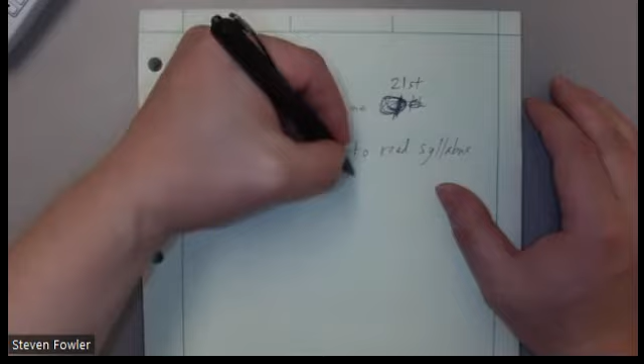All right. What's the best way to say this? Make sure to read the syllabus about missing an exam. You email me the day of the exam and say, I'm called into work, I can't come in. All right, that's option B. If you no call, no show an exam, that's a 0. Okay, so just be aware.

If you can't make the exam, let me know as soon as you know. If you can let me know 24 hours in advance, we could go with option A. I'll check my email throughout the weekend. I really need more than 24 hours to do it well. But if you give me at least 24 hours, I will work with you. I'll put you in the testing center. I'll have to write you a different version of the test than what everybody else gets, and I'll do my best to make it the same or similar difficulty. The more time I have, the easier that is to do. Inside 24 hours, I just can't do it.

I used to be a lot more lax about that. It just got overwhelming. 24 hours, that's really not enough. Okay. Any questions about that? Does that make sense? Simple thing, just be here, and neither one of us has to worry. I know things happen. If something happens and you can't be here on Tuesday the 21st at class time, let me know as much in advance as you can. Let me know one way or the other. Even if it's after the fact, you gotta let me know. If you just show up the next day, that's a 0. There's got to be a reason you didn't show up, right?

Okay. What else here? One advantage in the summer is since we've got a little more time, we don't have to start right at noon. We'll start probably around 12:05. It's not like a regular class where we've only got 75 minutes and we have to get you guys in and out so the next class can come in. We can be a little more relaxed about it. Whenever we start the exam, I'll give you 75 minutes from the time we start. So let's plan on probably starting around 12:05.

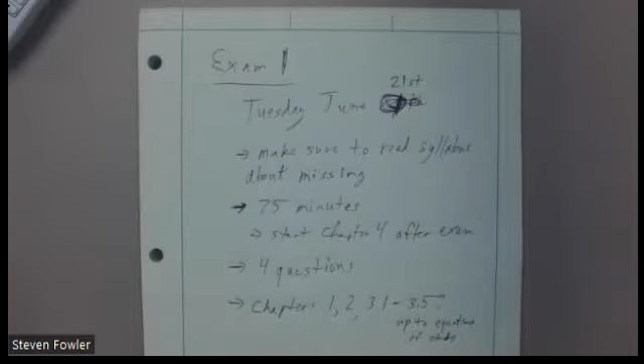So, kind of alluded to here, content is going to be chapters 1, 2, and then sections 3.1 through I think 3.5. Okay, it's going to be up to equations of state, not including equations of state. So the 3 videos I've asked you to watch, those are not on this exam, but they will be in the rest of the class. What else?

As we mentioned, the syllabus. Resources you can use. You get one sheet of notes.

Eight and a half inches by 11 inches. So specify size. You guys are engineers. Don't come in with 8.5 meters by 11 meters. That's too big, right? 8.5 inches by 11 inches.

I'm not picky what you put on. If you want to put a bunch of example problems on there, I would suggest you might rethink how you're working your homework problems, work some more, but you're welcome to, right? If that's what's going to help you, by all means, that's okay. If you just have some equations on it, that's fine.

Right? Probably won't have to put a lot of conversion factors on there if you're familiar with how the inside cover of the back of the book works. There's plenty of conversion factors there, so you should have what you need.

Are you okay if I print that off? Yes, absolutely. So here's the rule. It's an open book exam. So any material from the Çengel and Boles text, any version, I don't mind you having a printed copy. It's the same thing as somebody with a textbook.

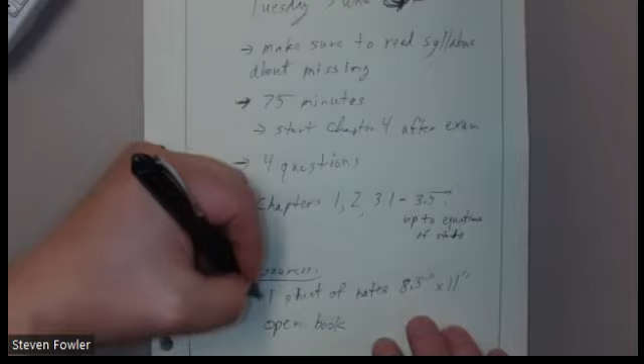And even if you have a textbook, I don't mind if you print additional copies. As long as it's from this text, this set of authors, yes, that's fine. Yeah, open book or printed material from this particular book.

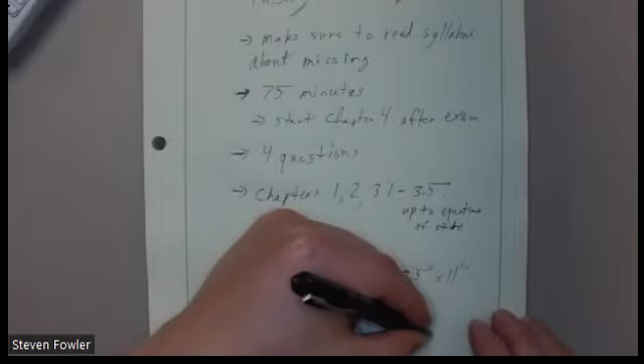We talked a little bit about calculators. Right now, I tend to be a little open with them. My general rule is without internet. So as long as it's sitting on your desk, you cannot access the internet wirelessly. Without internet or PDFs. So if I think you're looking through a solutions manual or something like that on your calculator, we're going to trade it out for one of mine.

Questions? Does that make sense? If you're just using a standard calculator, you should be just fine.

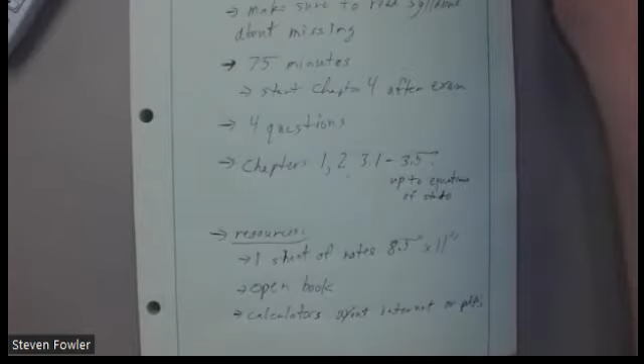I'll try to write a little bigger than that next time. Realize that's my limit now. Been a while since I've taught on a document. We'll make it work.

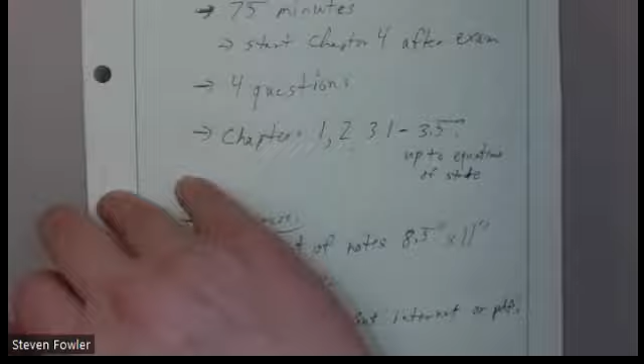Okay, so logistically, that's how the exam works. I will do everything I can to make every exam logistically work the same way. It'll just be different content and different questions.

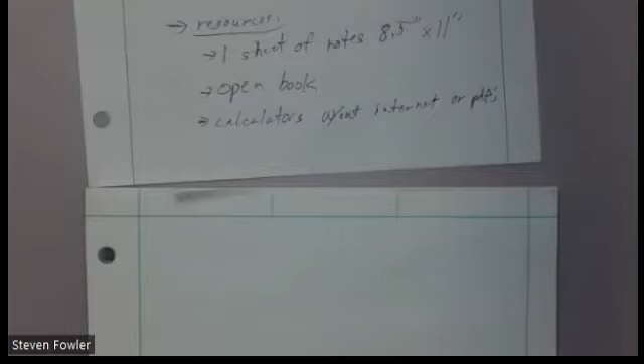All right. Then look at content. So are there particular questions you want me to look at? Maybe some examples or some homework you're struggling with? I don't mind doing that. I don't have any examples pre-worked out.

What I normally do is I go through kind of an outline of the material, give you kind of a refresh. We've seen the theory, worked some examples in class. Now you've worked some homework. And we come back and we look at the theory one more time, just kind of quickly. And that normally helps solidify things together.

But if there are particulars you want to look at, it's free form. We've got the time. I don't mind. If you think of something, let me know. Stop and say, I've got this example, or what about this topic from the homework? Give me a problem we can look at.

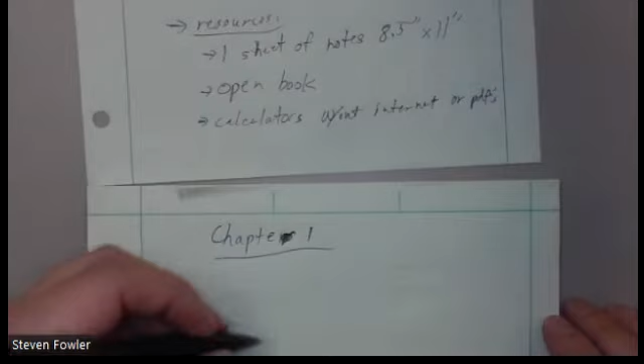Okay. So we look back at chapter 1 just real quickly here. Dimensions, units, which is going to be, as an engineer in the United States, the bane of your existence. Especially in thermal science classes. Thermodynamics is kind of the first of the thermal sciences that most people will take.

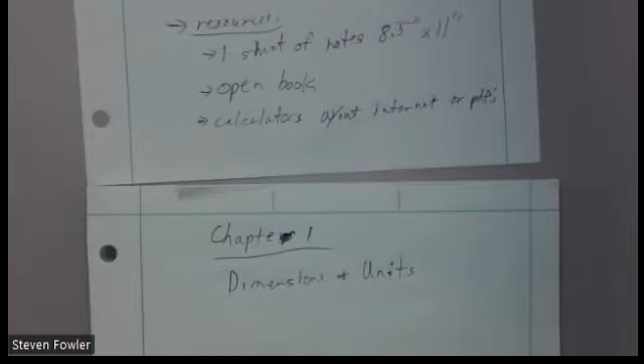Many of you will go on to take a fluid mechanics course, and after that, maybe go on to take a heat transfer, or maybe transport phenomena, which is like heat, mass and momentum transfer for chemical engineers. These are all what we consider the thermal sciences. And units are important in all of engineering, but it really makes some of the problems in thermal sciences a lot more challenging.

So when I'm adding or subtracting terms, they have to be in the same units. I can't get them to be in the same units if they're not the same dimensions. If a student asked me, okay, well, how can I convert BTUs to PSI? Can't, right? Those are different dimensions. That's energy and pressure. All the conversion factors in the world will not get you from PSI to BTUs, as pressure is not energy, and therefore we cannot convert those.

So those are different things, but units are used to measure dimensions in a standardized quantity that's easy for us to communicate.

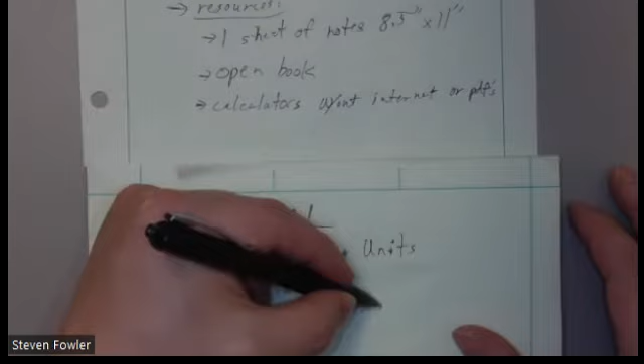We talked about systems. What are the two types of systems we talked about? Two types of systems. What are those? Closed is one. What's the other one? Right, so it is an open system, but we don't normally call it that. We call it something else.

Control volume. Control volume, absolutely. So control volume is kind of like an open system. Why? What is the difference between the two? One allows mass to go through and the other just allows energy. So for control volume, mass can cross the boundary. Closed systems, no mass crosses.

It's just a certain amount of mass contained in some kind of container. For us, it's going to be contained in some kind of container or tank. In your later classes, sometimes they will go on to more general definitions than just that. For our purposes, it's going to be like a tank. The closest is going to be like a tank or a piston, something where the mass is not crossing the

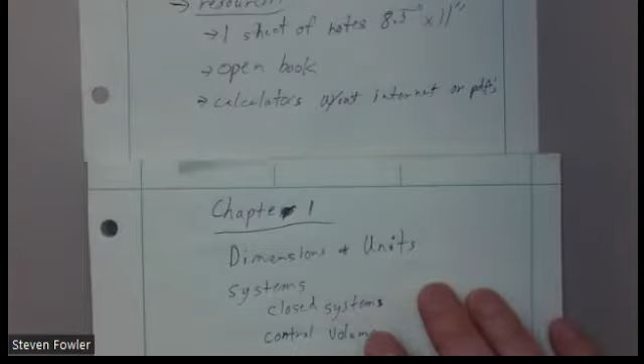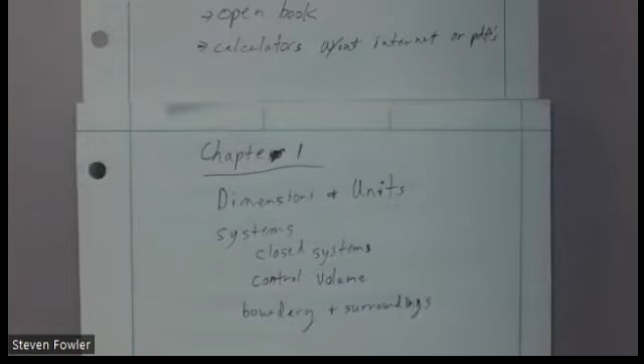boundary. Control volume is just we've established a boundary around some sort of device where mass is going to flow into or out. All right, very good. And of course, the boundary is what's going to separate our system from its surroundings. Chapter 4, we'll talk a lot more about what happens when that boundary moves, the volume of our system changes. There's an energy associated with that we've got to keep track of.

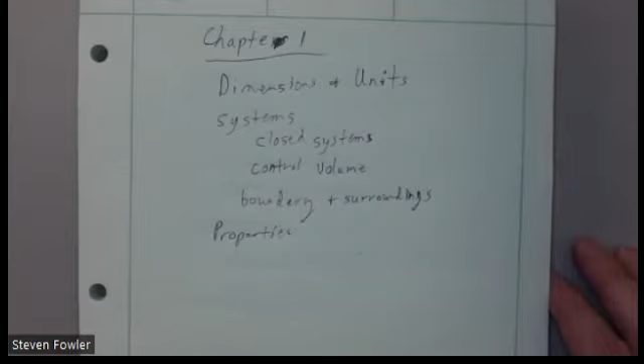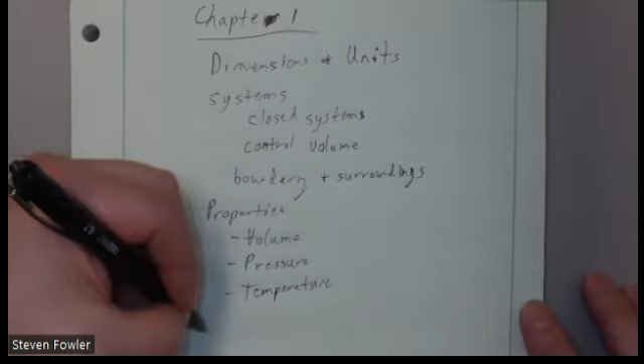And then we talked about properties. Properties are basically dimensions for our system, things we want to measure for our system. So there are three properties that are easy to measure: volume, pressure, and temperature. Within volume, of course, we talked about the idea of density, which is mass per unit volume, which is the reciprocal of specific volume, because specific volume is total volume per unit mass, the reciprocal of density.

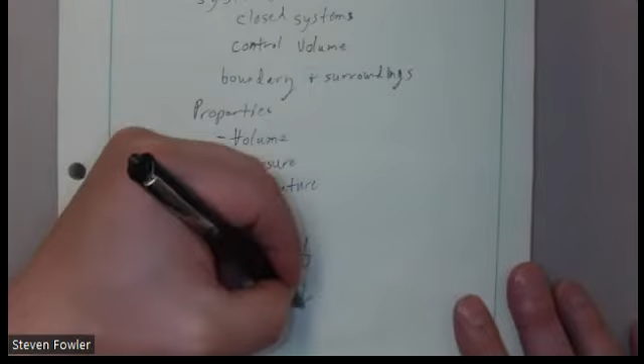So we'll use specific volume in this class more than we will density. We'll use density some, but we'll really focus on specific volume, and you see that in the property tables in chapter 3. A lot of times we're working with things that can be in the vapor state. It's easier to work with the specific volume of vapor than its density, because the density is really low. Working with liquid, I probably want to work with the density because the density is high and the specific volumes can be very low, because they're reciprocals of each other.

We talked about the different temperature scales. The change in temperature is going to be the same. A change in Rankine is the same as a change in Fahrenheit. A change in Kelvin is the same as a change in Celsius. But Rankine and Kelvin are the absolute scales. And we talked about pressure.

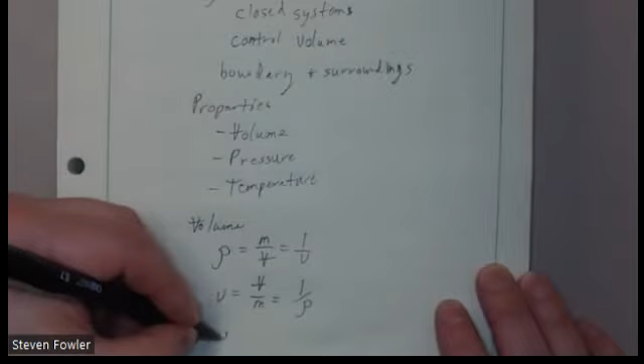And we said in a column of fluid, the pressure will change. The change in pressure between two locations, 1 and 2, is going to be the density of the fluid between those two locations, times the local gravitational acceleration, times the change in elevation. In this case, if I've got P2 minus P1 on the left side, here I'm going to say Z1 minus Z2, because I'm referring to Z as elevation. Z is increasing as we go up.

You can write delta P as rho g delta Z if you're referring to Z as depth. So as I increase depth, I will increase pressure. This text prefers to use Z to refer to elevation. It took me a few years teaching it to get used to it, because I actually learned Z as depth in this equation. Once I realized this, it makes sense what this text is doing. They're using Z as elevation in multiple places. It's dependent on the weight of the fluid above the location, which is going to cause an increase in pressure.

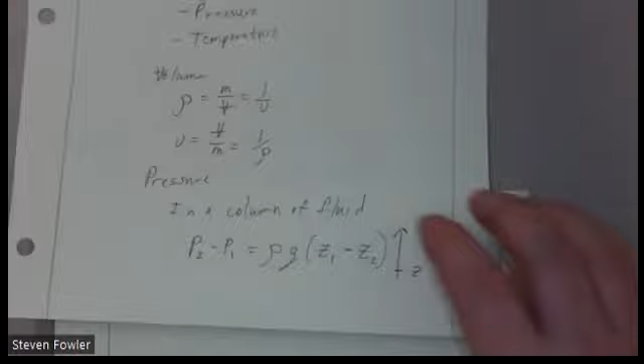If you have multiple fluids, there's a variety of ways we can splice this equation onto others. You can just set up 2 or 3 equations, one for each fluid, and splice them together algebraically. Or there are some methods you can learn on the internet or in other texts about writing a single equation, add this term, subtract this term. If you're okay learning and memorizing those rules, that's perfectly fine. If you want to stop by, I can point you in the right direction. I just don't like doing that in class because there are a lot of details that get mixed up.

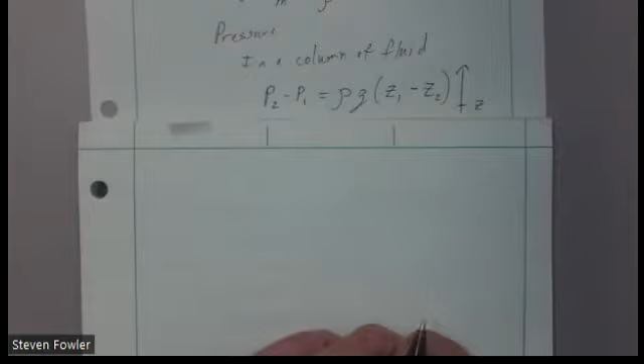Okay, that wraps up chapter 1. Again, chapter 1 is focusing on systems and properties. We have to understand dimensions and units to understand properties, because properties are dimensions. We talk about the different properties of a system that we can measure. Then from there we get into chapter 2.

Chapter 2, our focus is on another dimension, another quantity we call energy. So in a physics class, they would have introduced you to forms of mechanical energy: work, kinetic energy, potential energy. These are mechanical types of energy. It's very easy to convert mechanical types of energy to one another. Here, we're going to also introduce a couple of other types of energy that maybe you didn't see in a physics class. We're going to talk about what we consider more of the thermal types of energies.

The first law is just simply conservation of energy. The second law is going to be more focused on which type of energy we're dealing with and how they can be impacted. But we'll get to that in chapter 7. Right? We said a general energy, E, would be the sum of different types of energy. And so if I've added different types of energy, maybe I'm adding heat and work together. Those are different kinds of energy. So I would just represent it with a general term.

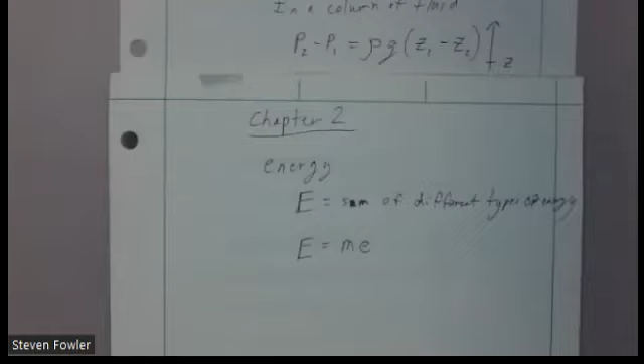And big E, we can find if I know the mass of my system and I know the specific energy, the energy per unit mass within the system. So we do this a lot. We'll use a lowercase variable for something that's what we call intensive. It doesn't matter how big or small the system is, it's easy to scale up. And if I know how big or small the system is, I can multiply by mass, and that gives me the total energy. We see the same thing back over here with volume. We'll see this with a variety of variables throughout the semester. This is common in the thermal sciences.

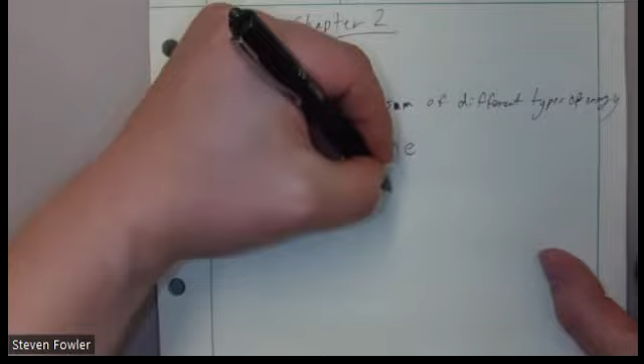If something is per unit mass, we'll use the lowercase variable. We're doing the same thing here. Lowercase e is per unit mass, so we use the lowercase variable for the intensive property. Okay. Energy rates. We said if I put a dot above a variable, that means it's a rate. It's being measured per unit time. Something else that's common in the thermal sciences. This is E dot. E dot would be the product of m dot and lowercase e. Lowercase e is energy per unit mass. M dot is mass per unit time. Energy per mass times mass per time gives me energy per time.

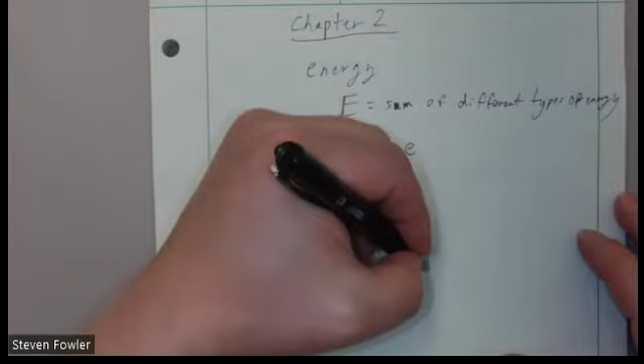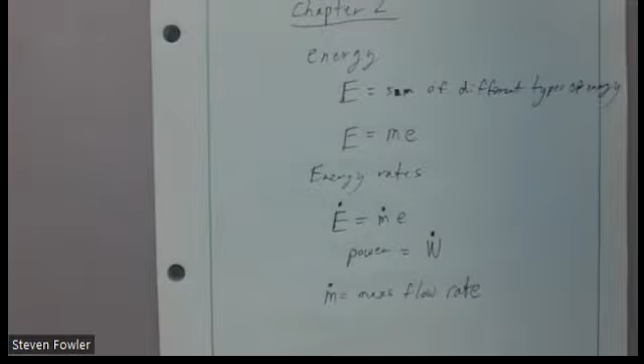And again, the term power is specifically work rate. I wouldn't count you wrong if you said the rate of heat is power, or any general energy rate is power, but we normally reserve power specifically for a work rate. What else then? I've mentioned here the m dot, which is the mass flow rate. Not the E's. Anybody remember how we find mass flow rate? There's a variety of ways. Yes. Density times volume flow rate.

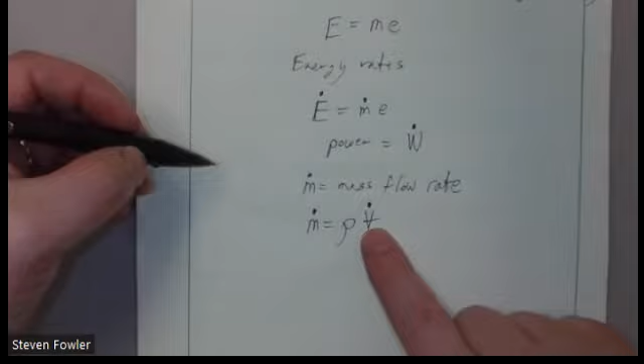If we look at the dimensions on this, this is mass per unit volume. And the volumetric flow rate, the V dot, again, you put a dot above a variable, that's per unit time. So it's volume per time. So mass per volume times volume per time leaves me with mass per unit time. How can I find V dot? We can go out with a measuring cup and a stopwatch. That works if it's water. Not so good if it's ammonia. That kills us, right? So this is something I can't go out and physically measure.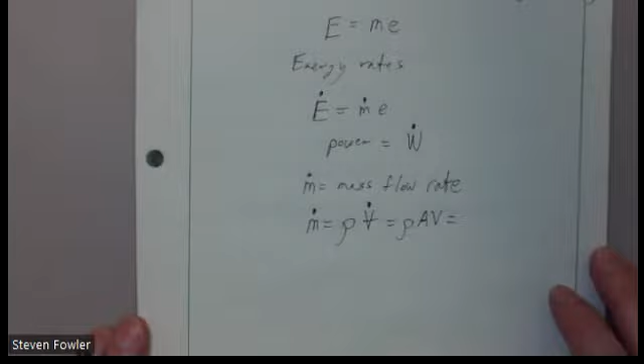What we can do is, if I know the cross-sectional area of the conduit and the average speed at which the fluid flows through that conduit, the product of area times speed gives two lengths and a third length per unit time. That's 3 lengths per time, volume per time. So the average speed of the fluid times the cross-sectional area gives me the volumetric flow rate; multiply by the density, that gives me mass flow rate. And have some way of knowing which V you're talking about, because all three of them show up right here, because the reciprocal of density is the specific volume and vice versa.

So I can also find this if I know the specific volume, by dividing by specific volume instead of multiplying by density. So know which V you're talking about. Let the units be your guide. If it's length per time, that's a speed. Volume per time, that's a V dot. If it's volume per mass, that's a lowercase v. All right.

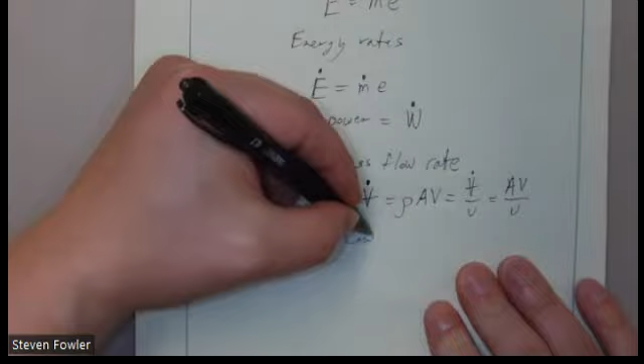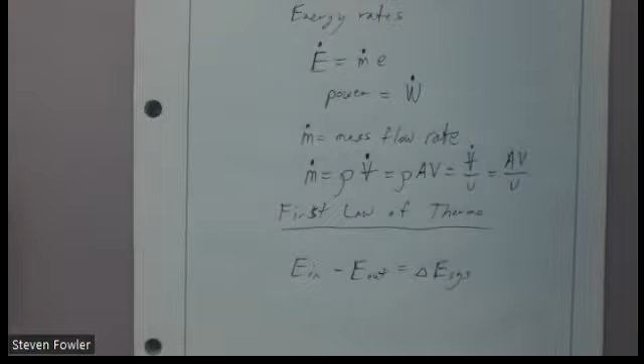So again, what we're doing in chapter 2 is introducing the first law of thermodynamics. The first law of thermo simply says that if I take the total energy coming into my system minus the total energy out of my system, that equals the change in the energy of my system. In minus out.

Now, you can write the big long equation if you like. That's okay. That's what we're going to do next. If we think about our system, what types of energy can come into the system? Well, that can come in 3 forms. There's 3 types of energy that can cross the boundary. That's heat, that's Q. There's work, that's W. And if I've got any mass flowing, that's also going to have its own energy.

So these are all the types of energy that can come in. So I'm going to add all those. I'm going to subtract all the types of energy that can go out. And that's the same ones. Q out minus work out minus energy of mass going out.

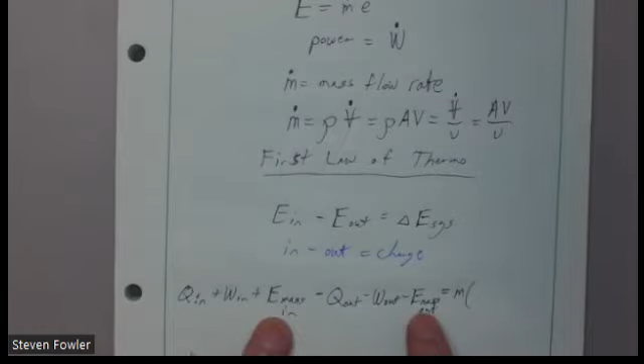Now, if I say this is equal to the change, if my mass is constant, I can factor that out. Now, it's possible I have as much mass coming in as I have mass going out. I just have to account for the energy. If the mass happens to be constant, then I just have m times all the specific energy changes.

Well, what types of energy can the system have? The system can have internal energy, so that could change. It can have kinetic energy, that's v squared. It's v2 squared minus v1 squared, both over 2. And it can have potential energy.

Just about ran out of room. Probably should have moved to the next line. Normally, I don't like writing in the margins of engineering paper, but I'm just trying to squeeze one line.

Add the ins, subtract the outs, that equals the change. I would suggest having that on your equation sheet, obviously. But what I'm trying to preach to you here is don't think about this as just one equation with lots of terms. Think about this as a concept. Think about this as, again, you're conserving energy. That means the in minus the out has to equal the change.

And then you can kind of break it up into pieces. You don't have to remember each term arbitrarily. You can remember, all right, what are the types of energy that can go in or out? Heat, work, mass. So I add those terms in, subtract those terms away. And that equals the types of energy that can change. There's 3 types of energy that can change. It's internal, kinetic, potential.

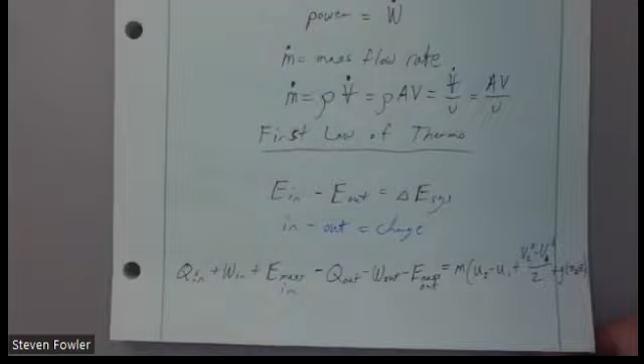So it's a process. We're kind of building as we go, right? And we're getting up to now where we're going to really start working on some pretty interesting problems, but let's make sure we've got a good handle on chapter 2. So there's another concept that shows up in chapter 2. We don't see it too much after chapter 2 for a while. There's this idea of

efficiency. We use the symbol eta to refer to efficiency. That's common in most engineering. Okay. Conceptually, they like us to think about this as output over input, they being the authors of this particular text. I'm not the biggest fan of this idea. It works most of the time, so I can understand why they like preaching it's always output over input. I don't think that's fair or a good idea to say it's always output over input.

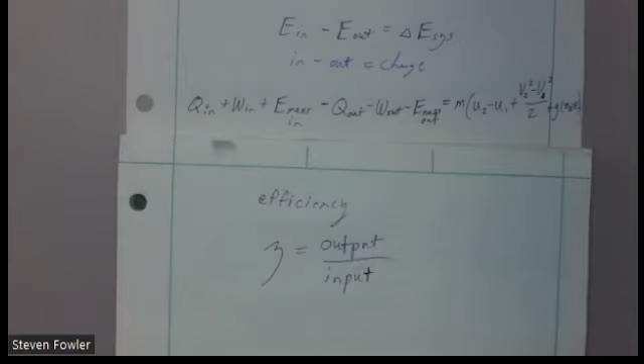Most devices we work with, we're trying to produce some sort of desired output, and that's going to be less than the required input. So it's a pretty good model that works most of the time. Conceptually, you want to think about it as what do you want or what do you desire divided by what do you have to do to get it. It should also always be the expected smaller value divided by the expected larger value. Why is that?

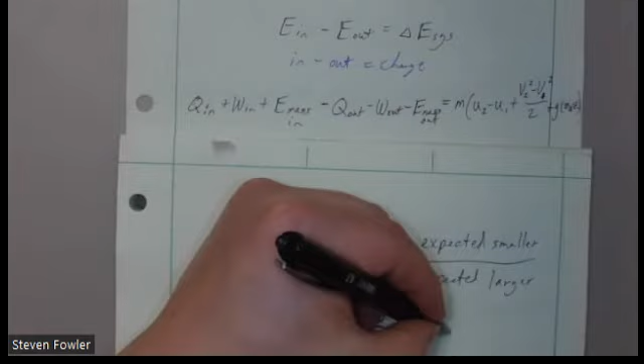Well, as a rule, efficiency is a number between 0 and 100%. It's going to be unitless. It's a ratio, so that means it needs to have the same units in the numerator and the denominator. So BTUs over BTUs, watts over watts, horsepower over horsepower. Just depends on what you're measuring. Are you measuring power over heat input? Are you measuring energy over some other energy? Are you measuring distance over distance?

Efficiency can be used for any type of thing. It doesn't have to just be limited to thermodynamics. You can take a variety of things. But a true efficiency, an actual efficiency, is going to have the same quantity or same dimensions on top and bottom. We get them in the same units. And then when we take the ratio, we get this unitless quantity between 0 and 100%. That's a true efficiency. There are other ways we can measure performance in a similar fashion. We'll see some of that in chapter 6. They aren't actually what we would call efficiencies, but they work with the same concept.

Two piles of paper here. I'm trying to keep them straight. All right. Page 4. Okay. What else have we got here? Questions so far?

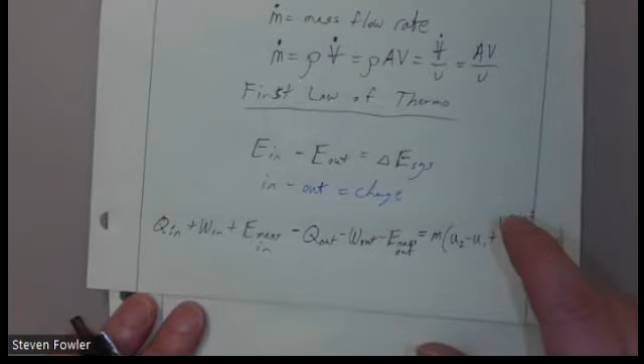That's property tables. Chapter 5, we're going to need H values. We'll talk about why when we get there. Chapter 7, we're going to need U values and then S values, the entropy values, and we find those the exact same way. So, like I say, practice that. That's the reason I set the chapter 3 quiz up for you guys. Give you some additional practice. Hopefully it helps. I was not intending to be extra burdensome, just give you an additional tool.

All right, what else then? So that brings us then to chapter 3. Chapter 2, we look at the next one on the energy rate. So that equals the mass flow rate times. Yes. Yeah, so the E dot just specifies that it's energy per unit time. So the common way we'll get there is if I know some energy per unit mass multiplied by the rate at which mass is flowing. That'll give me the rate at which energy is flowing by mass. That's the most common way we'll see that.

So in a control volume, I'll have material flowing through it constantly, and I may not know the exact amount of time over which that occurs. So all I can do is just look at the rate at which it's occurring. Thermo's kind of the first place where we really start seeing where you can work the problem a variety of ways. You can work it per unit mass, work it per unit time, depending on what's given to you. Sometimes we have to work it one way, sometimes another way. I know that's new for us, but we kind of introduced that concept. What else?

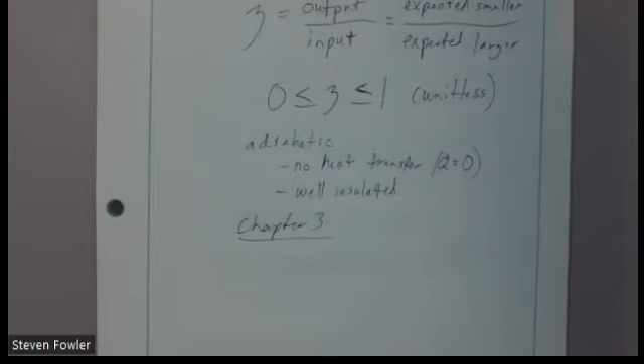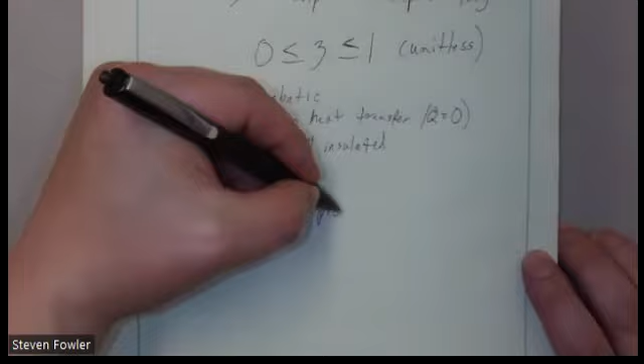Cool. Let's continue on. We'll talk about chapter 3 now. Let's refresh that a little bit. That should be somewhat fresh, but especially because it is so fresh, hitting it again does not hurt. So let's just start here. We'll just say using property tables. I might not get this exactly the way I drew it on the board the other day, or exactly how it was in the videos. There might be a difference, but the general process is about the same.

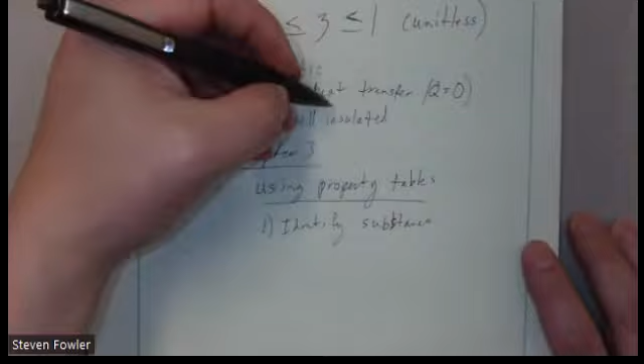Number one, identify your substance. Anytime you're looking for property tables, or determine properties, anytime I hit a point in the problem where I need to know a property for my system, whether it's a U value, an S value, or a T value, the first question becomes, what's my substance? What is my system made of? And then what tools do I have to try to quantify those properties for that substance?

For us, it's going to be water and R134 right now. Chapter 4 and beyond, it might be some ideal gas as well. It's water, R134, and typically air is going to be our ideal gas of choice for the most part. But it could be nitrogen or oxygen, carbon dioxide, something like that. We'll touch just a little bit on solids and liquids. Those are pretty simple tools. But number one, what substance am I working with? That's going to determine what path I'm going forward with.

Step 2 then is identify known properties. Now, for water and R134 tables, I say R134, it's R134a. There's technically an A at the end of it. I try to write it, but I rarely say it. For water and R134, I need at least two properties. In a rare circumstance, I might need three. We can talk about that. I'm not going to intentionally give that to you.

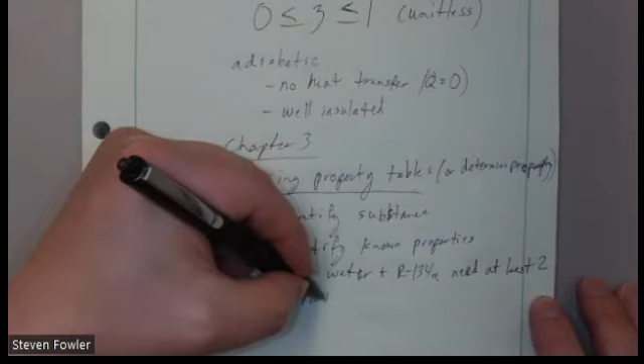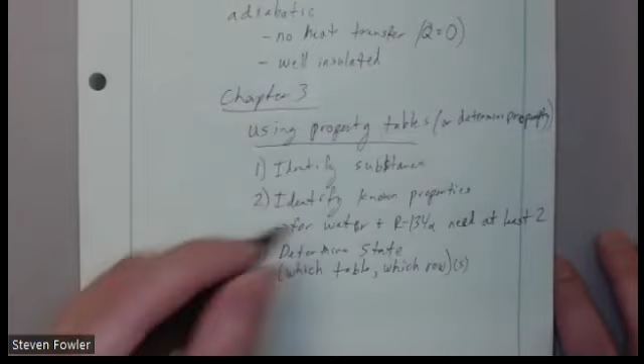Step 3 would be to determine state. Where do you live on the three-dimensional PVT surface? We're not going to plot it on the surface, but what it does mean is we need to know which table and which row. That's really what we're saying here. So if I'm using property tables, which table am I using and which row within that table are my values going to come from? Or, as we'll see, it could be rows, and then we interpolate between.

Right? So some things to mention here: you have to watch your units. And it's going to require you to determine what we call the phase. Solid, liquid, gas, vapor, where am I on the spectrum? Because the tables are broken up depending on the phase.

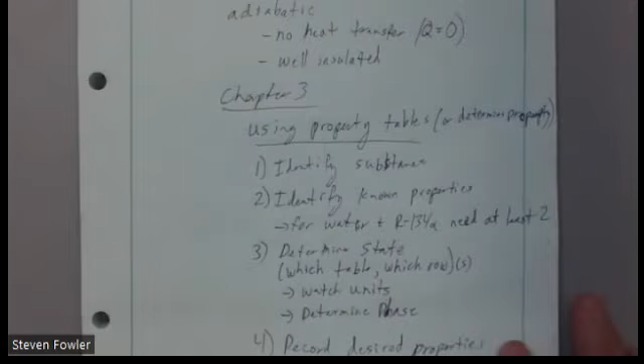Step 4 is record desired properties. You can go through and willy-nilly record all the properties. I'm not going to. I'm going to go back to my problem. So here in chapter 3, the goal is just to learn to use the property tables. We're going to go back to chapter 4, and we're going to have this problem.

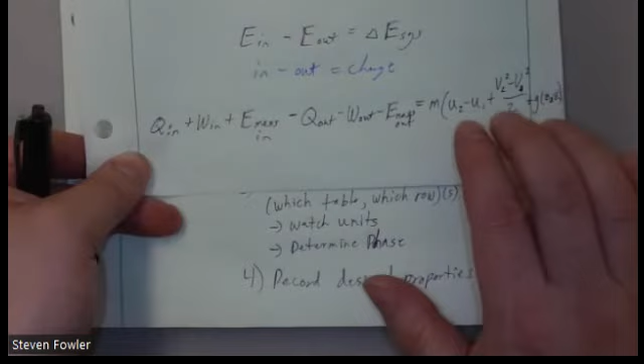We're going to take this first law equation and simplify it. We're going to have one, maybe two of these energies on the left-hand side. Probably not going to have kinetic or potential energy. So probably heat minus work is going to equal m delta U for a chapter 4 problem. So I'm going to use the properties given about my system to determine the U values from the tables and use those to find either the heat or the work, whichever one's not known. That's how this is going to look moving forward.

So which properties do you record? Well, you need to look at the rest of your problem and see which ones you need. Do you need the volume? Do you need the internal energy? Later on, do you need the entropy?

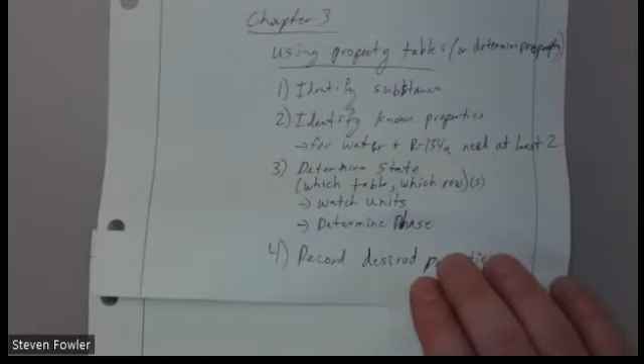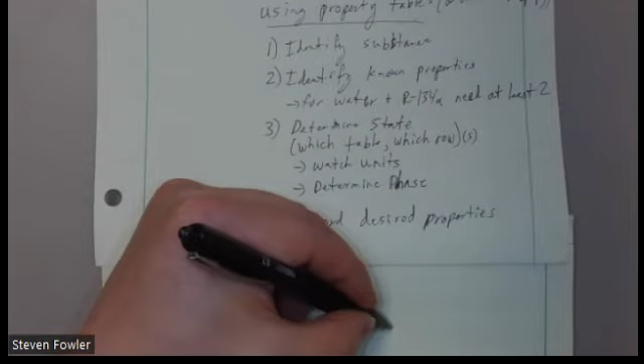Now, as we've seen, determine the phase is just a nice, simple little sub point there. But it's where most of your effort's going to be. Determining the phase is one that's going to take you some of the most practice. So we break that out into its own section: determine the phase. It's not as simple as just go do it. I mean, it is once you get used to it. There are two main scenarios.

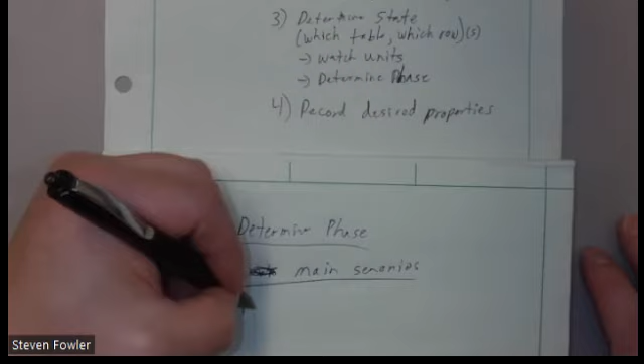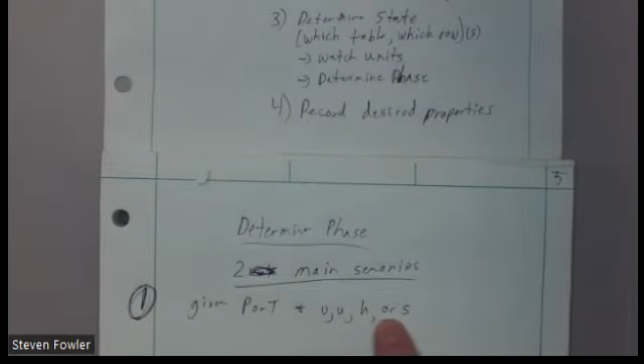So as we said earlier, you need at least two properties. That's going to come in one of two flavors, so to speak. Given P or T and V, U, H, or S. This is the first scenario: given P or T, one of these two, and then one of these four. These are your two properties. It doesn't matter which combination. There's 8 different possible combinations there, and it looks roughly the same way.

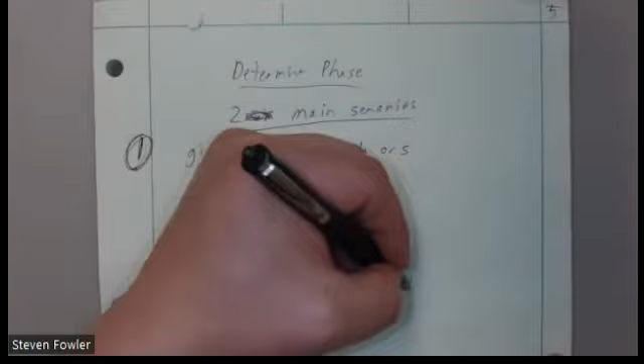You can put P or T, whichever one you're given, on the y-axis, and V, U, H, or S on the x-axis, and just arbitrarily draw this diagram. Given your P or T value, you look up the values for saturated liquid and saturated vapor. That tells you where the edge of the saturation dome is at that pressure or temperature. Then given your other value, V, U, H, or S, look up the liquid and vapor values for that property and compare yours to these two. If it puts you in between, you're in a saturated mix. If it puts you out here, you're in a superheated vapor. To the other side, you're in a compressed liquid.

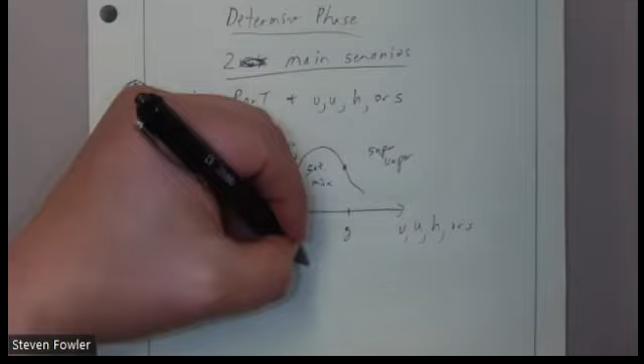Now, my preference is to draw it out. We can write this in words easy enough. It comes in the form of like 5 if-then statements. At given P or T, I'm just going to say V, and that could be V, U, H, or S. The rules are the same. If at the given P, your V is less than V sub F, you have what we call a compressed liquid.

So then, and again, what I'm writing down here is just this in words. So if the words help you, fine. If not, I'm going to write them one time and I'm not going to write them again. Well, it's worthwhile to write them one time. It's worthwhile to process information multiple ways. So it's okay to write them out. We talk about it, right? But this is probably the only time I'm going to write them out.

So if at the given pressure or temperature, your V value is equal to V sub F, that tells us we have saturated liquid. That liquid is right at the point of boiling. It's literally boiling liquid. If I add any more energy to it, some of it's going to vaporize.

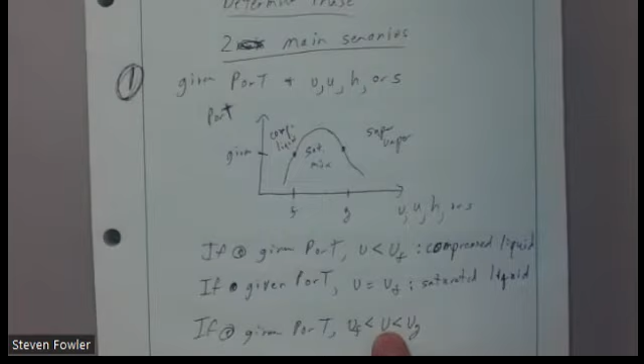Okay. Well, if at the given pressure or temperature, your V value then is between these two, so V sub F is less than V is less than V sub G. Your V value is between these two limits. That puts you in the dome range. If this is your scenario, you have a saturated mix. A saturated mix.

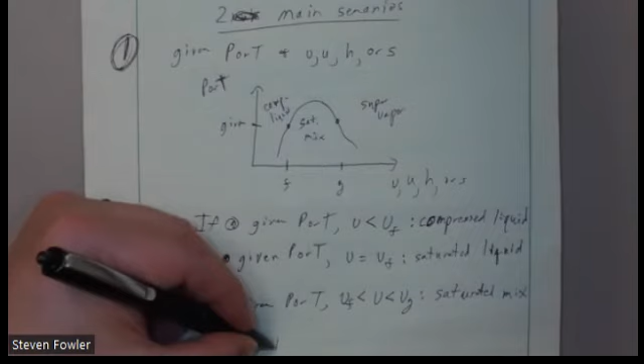So how do we do that? Well, we need to find the quality. The X value is the quality. This is the portion in the vapor phase. How much of it? It's somewhere between a vapor and a liquid. How much is vapor? How much is liquid? We're gonna have to figure that out. Well, given the V value you have, subtract from it the V value for saturated liquid, and then divide that by the V value for saturated vapor minus the value for saturated liquid. So it's V minus V sub F over V sub G minus V sub F.

And I can do the same thing for all 4 properties. This is also equal to U minus U sub F divided by UFG. That UFG value is the difference between UG and UF, so you can manually take UG minus UF. The saturated vapor value is always larger than the saturated liquid, no matter which of the properties it is. So there's always this difference on the bottom, right? And again, this UFG is just UG minus UF already done for you if you want to use it.

Same thing for H, the enthalpy. Same thing for the entropy, S minus S sub F over SFG. So once I find the quality with one of those four properties, I can use that quality, that X value, then to find the other properties. Again, remember, quality is between 0 and 1.

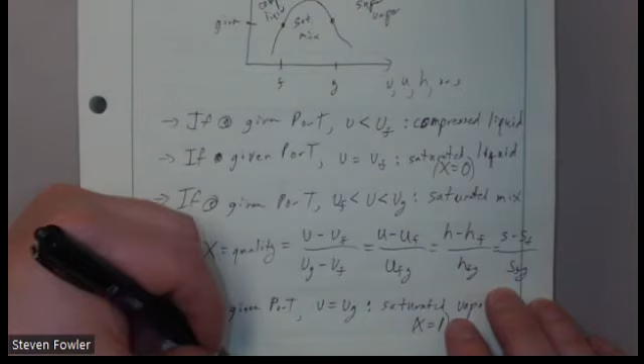So as I said, there's about 5 if-then statements. There's 4, here's the 5th one. If at the given pressure or temperature, you have a V value that is greater than V sub G, this puts you in the superheated vapor region. And then we just go to the superheated tables.

They are rather extensive. You might fall between rows; just interpolate between rows. You might fall between pressure blocks; you can interpolate between pressure blocks, between 2 different columns. If you need help with that, stop by. It's interpolation. The math is pretty simple, but conceptually I understand it's a bit of a challenge. After we do it a little bit, it starts getting easier. Questions so far?

This is one scenario. Again, my preference is the diagram because while this is thorough and very good, I don't think it's efficient myself. I'm a picture person, right? If I see it, it makes more sense to me. There's nothing wrong with this. This is perfectly good, and there's detail here I don't have here, right? I haven't talked about the quality. It's important.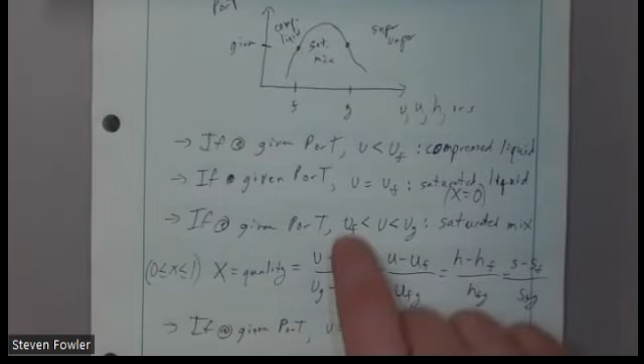This is what it looks like in words. Okay. So what am I doing here? Well, I'm saying, all right, given my pressure or temperature, go find these values and compare mine to these values. And that tells me where I am on the diagram. And that's what I'm saying here. It's given pressure, temperature, find your value. How does it compare to the other limits? And that's how we determine the phase. That's one scenario. That covers all 8 of these combinations.

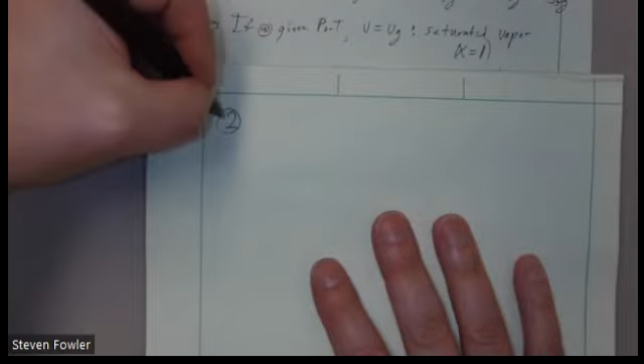The other scenario is a little simpler. Only one possible combination of that. Okay. Determining the phase, part 2. That is the scenario where I'm given pressure and temperature. Again, I think the diagram is a nice, simple place to start. We can write it out in words. I'm happy to do that. I like to draw a table when I do that. But let's talk about this second.

Put P on the y-axis, T on the x-axis. Just draw a curve arbitrarily out there. Concave up curve, half U basically. What I like to do is take the given pressure and go look up the saturated temperature. That's the boiling temperature. And if your temperature that you have is greater than the saturated temperature, that puts you over here in the superheated vapor region. If my temperature is less than the saturated temperature, that puts me on this side of the curve, which is the compressed liquid region.

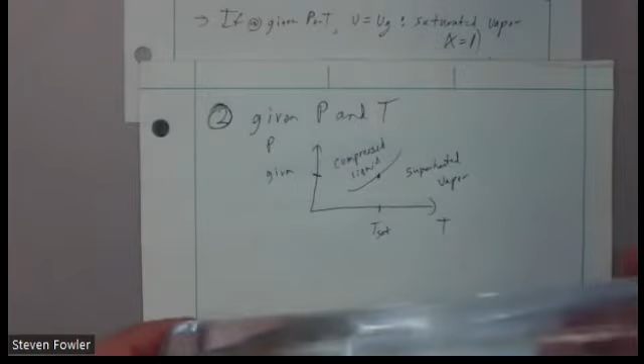An easy one to think about is I've got water here, right? So as long as this water is at 1 atmosphere, 101 kilopascals, my saturated temperature for that water is going to be about 100 degrees Celsius. So if I have water at 1 atmosphere and it's above 100 degrees Celsius, that puts me over here on this side of that curve. That's the superheated vapor region. If my water is at a temperature less than 100 degrees Celsius, this is probably 40, 50 degrees Fahrenheit. So probably in the teens in Celsius. That's going to put me over here because 100 is here and I'm back here. So it puts me in the liquid region.

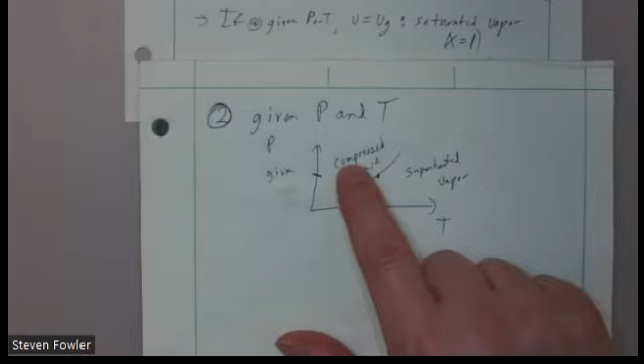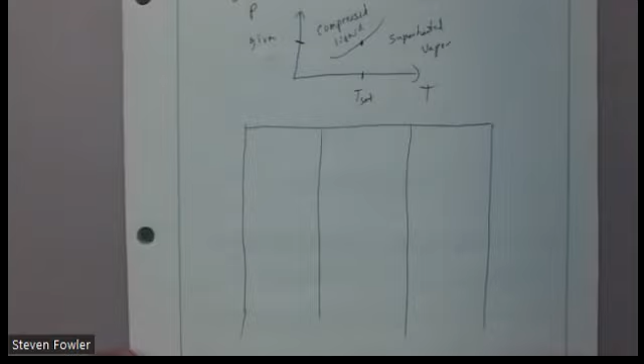Now, if we put this out in words, which is not a bad idea, again, a nice way to process information multiple ways. What I like to do with this is build a table. I'm going to build basically a 3x3 table, 3 rows, 3 columns. We'll draw 3 columns across, and we'll close the bottom off when we get it filled in. So what's this look like in words? Well, if I've got compressed liquid, what that looks like is at the given pressure, your temperature is less than the saturated temperature. And the saturated temperature is the boiling temperature. So at the given pressure, your temperature is less than the saturated temperature. That's a compressed liquid.

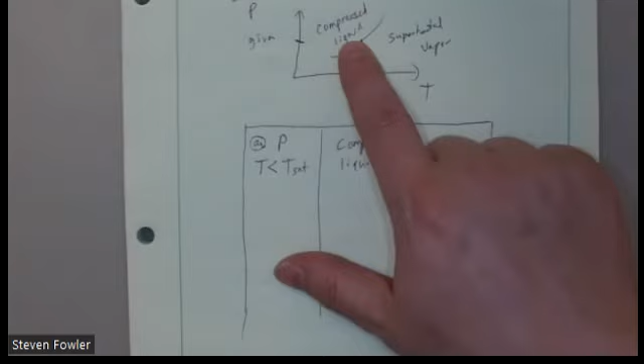Now you can look at it the other direction. I prefer to, given the pressure, go look at the saturated temperature. That's what I prefer to do. You can, given the temperature, go look up the saturated pressure, but the direction here flips, okay? What that means is, at the given temperature, if my pressure is greater than the saturated pressure.

Now, what I do in my head to wrap around how I think about that: the saturated pressure is the minimum pressure at this temperature to keep the molecules in the liquid phase. If I have more pressure than that, then it's going to push those molecules even harder together and force them to stay in the liquid phase. Okay? So the saturated pressure is kind of the minimum pressure required to maintain liquid at that given temperature. If I have more than that, I'm going to maintain liquid just fine. It's not as natural to think about probably, but that's how I wrestle that around in my head. Maybe that helps you a little bit.

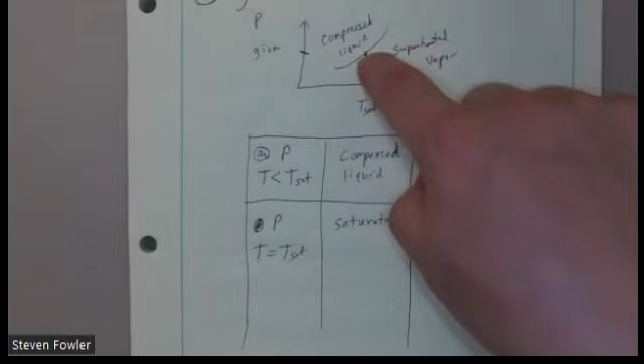So the next scenario then is at the given pressure, my temperature is equal to the saturated temperature. My phase is saturated. It's on the curve. Now here's the problem with that. I don't know where it's at. All I know is that I'm somewhere between here and here on the saturated dome, right? From this side, because here I'm looking at the edge of the saturated dome, I don't know how far, which way on the saturated dome. It's somewhere in here. At the given pressure, I go look up the saturated temperature and it matches. I have saturated something.

I need a third property. This is the only scenario where 2 properties does not work. Third property. You're somewhere between a liquid and a vapor. We don't know enough information to tell you that. Not something I would intentionally give you, wouldn't give you on a test, I wouldn't intentionally give it on a homework. Right? That's a scenario where, okay, the problem is literally impossible, you just have to explain why it's impossible. I don't have enough information to determine the phase, therefore I can't give you the V value, the U value, whatever it is I need to solve the problem, because I don't know how much vapor and liquid we have.

Again, not something I would give to you, but it's just something to be aware of. Same thing here. At the given T, pressure is equal to the saturated pressure. It's just not enough information. We just know we're on the curve. We just don't know how far into or out of the page we are. Okay. So third row then down here. That's the superheated vapor row.

So how do we know we're at a superheated vapor? Well, the simple one is, the way I like to do it is at the given pressure, I go look up the temperature. If my temperature has exceeded the boiling temperature, the saturated temperature, that puts me over here in the superheated vapor region. Now you can go at the given temperature, go look up the saturated pressure. Then if my pressure is lower than that, that drops me down in here to the superheated vapor region. It puts me below the curve, the lower pressure, right?

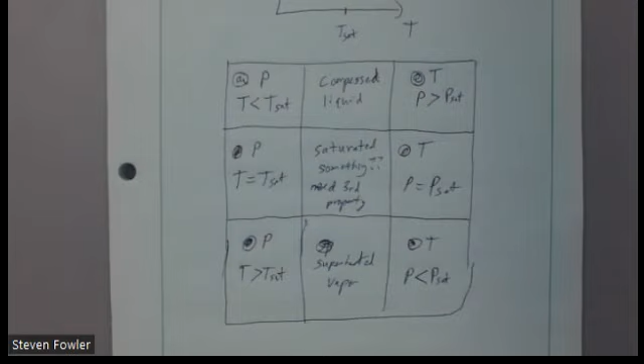And again, the way I wrestle that in my head is I think about the saturated pressure. The saturated pressure is the minimum pressure required to maintain liquid. If I have less pressure than the minimum required to maintain liquid, the molecules are not being pushed together as hard, so they're allowed to fly off. They're allowed to escape each other. That's how I wrestle. Hopefully that helps. Questions there? Hopefully that helps a little bit solidify, seeing that just another way. Again, we're going to use that throughout the semester.

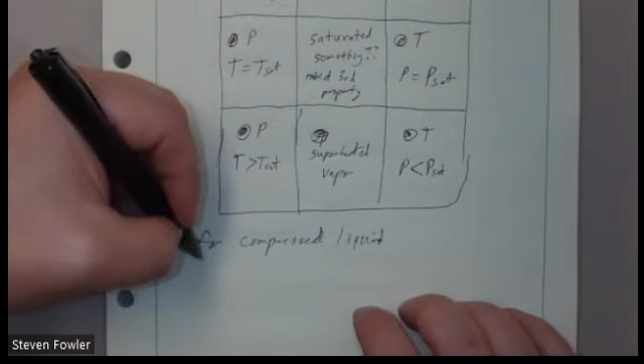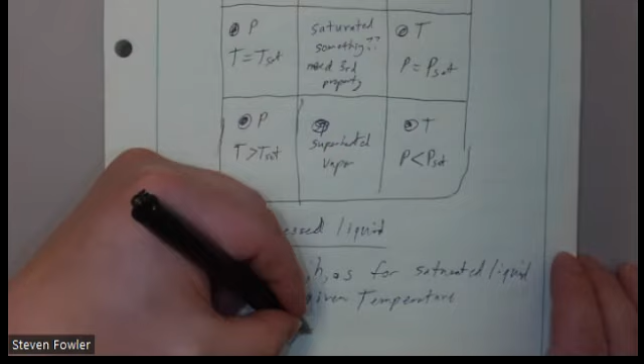Okay, last couple of things here. For compressed liquid, for water and R134, we use V, U, H, S of saturated liquid at a given temperature. If you know you have compressed liquid, you ignore the pressure, essentially. Unless it's like a really high pressure, we're not even going to worry about it. We're just going to assume temperature is the driving factor for a liquid. We'll look up saturated liquid values at the given temperature. And that'll give you a fine estimate. It's an estimate, but it's a pretty darn good estimate. Good for 2 significant figures almost always, probably good for 3.

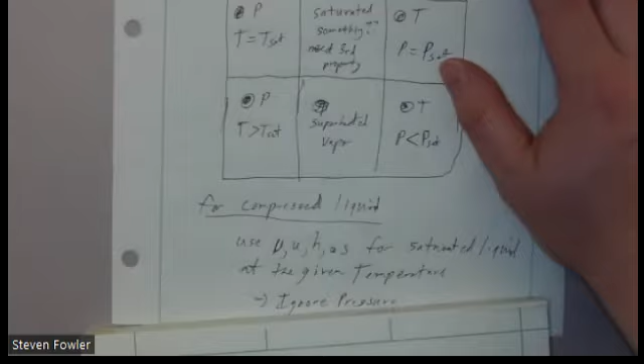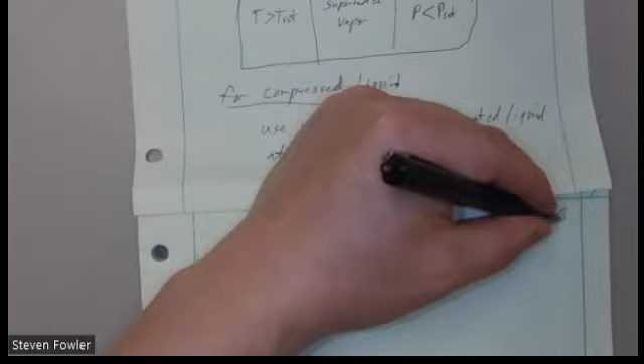Last little bit to talk about here. 7. If your value falls between rows, we'll just call them rows A and B. So if I'm looking for a value between 2 rows, how do I do that? Well, I'm going to construct a line mathematically. So you've got data points for point A and point B, so it's x minus XA on top, XB minus XA on bottom. I'm constructing a line mathematically between points A and B. So y minus YA divided by YB minus YA.

So the last example, we were between temperature values. So we said, use the temperature values here for X. We're looking for the Y value. In that case, it was the V value, the specific volume. It could be the internal energy, entropy, any of the other properties. If I know I'm between two temperatures, I know my U value is going to be between the U values for those respective temperatures. Use this to figure out how far in between these two this value is. Solve it. So algebra wise, they're pretty simple. It does take a little practice learning how to solve those.

What else? Questions for me? It's a solid 75 minutes of rapid fire review of 3 chapters. My voice is getting close, but I'm happy to talk. If you guys have questions, I'm happy to answer. I'm happy giving you some extra time.